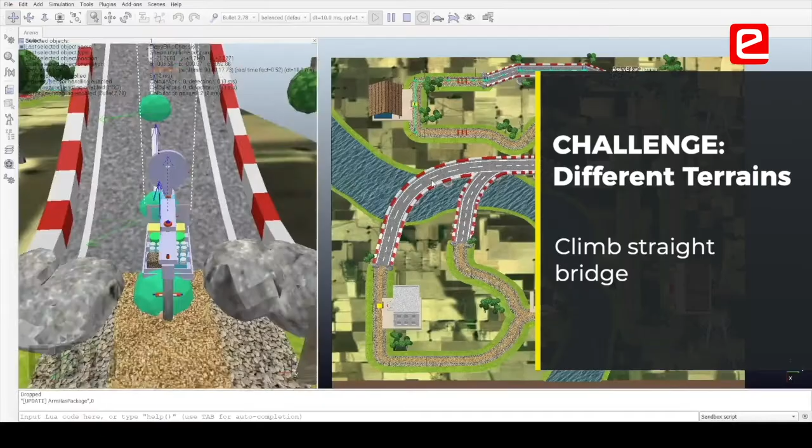When we have to design any control law, I will divide the categories under which the gain is changing, specifically when I am fixing the methodology as proportional control only. Then I will look into tuning the gains in different categories. But when I'm moving from one category to another category, is there anything that I should be worried about?

When we try to change the gains abruptly, the actuator may not be able to give that output all of a sudden. So I think that would be a problem in real time. It was in simulation. So the response time of the actuator, because when you are giving discontinuous inputs, that's what theory says.

Do you think this is scalable? At some level, faced with constant disturbances and undulations or irregularities in your path, this algorithm would be tantamount to remodeling at every step, and it's going to be very computationally intensive. Because if you're going to readapt these weights, it's exactly like a time varying feedback then, right? It's no longer going to be a constant gain matrix that's going to be fed back. So you're going to be treating the system like a time varying system that way.

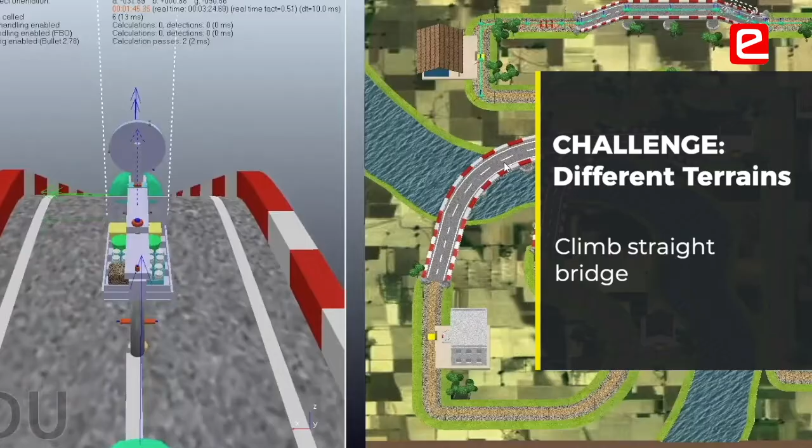And I'm not sure that is the way we want to model this. Because, of course, there are distinct changes in the model, in the weights, after every pickup or drop-off. But when you're going along a path and you face disturbances, those are not treated as changes in the model. Ideally, you can consider them as time-varying models, but that's not how we do it. We still model them as LTI systems, and we provide an LTI feedback to design an LTI controller, linear time-invariant controller. Not really a time-varying system as such.

But the approach you're adopting seems to suggest that, instead of treating these changes as disturbances, you are trying to incorporate them in the model. Now, the price you will end up paying is a lot of computation, a lot of burden on the computation, because you are expecting to be able to model this in exactitude. But the goal of controls, on the other hand, is that even with an inexact model, you should be able to design a fair enough controller that should address not just a single model, but a whole family of plant models.

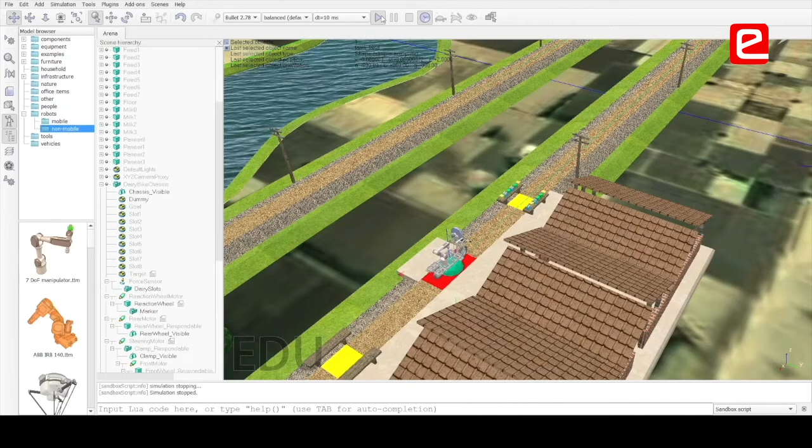You're moving along a straight path. Once you have stabilized something, unless there is some external disturbance, there's no reason for that particular system to move away from its stable equilibrium. It's only when there are disturbances or undesirable forces at play that you are waylaid from that equilibrium, and you want to have a restoring force or power generated which restores you back to that equilibrium, which is essentially the goal of control. Right? So for that, you don't necessarily consider it to be a time-varying system. You consider those to be just that, disturbances.

You'll have a huge lookup table for all possible scenarios, all possible changes, all possible fluctuations, all possible disturbances, and you have a lot of if-then clauses. If this, then that. If this, then that. Right? So every time you're constantly sensing and checking and doing that. Per se, I have no problem with that, except for the fact that when you face more complicated scenarios, this is going to be nightmarish, is what I'm going to suggest.

How important it is to be a tinkerer if you want to be an engineer, in the sense that you should be playing with toy cars and breaking things and making them again. And the way I would intuitively relate to this is that if you lower the CG, the ground clearance is less, and you have to put smaller wheels which have other disadvantages. As you raise it, ground clearance is better, and you can put bigger wheels and there might be less rolling resistance. So it just shows that in engineering, it's lots of conflicting constraints that one has to battle with in order to come up with the right kind of design.

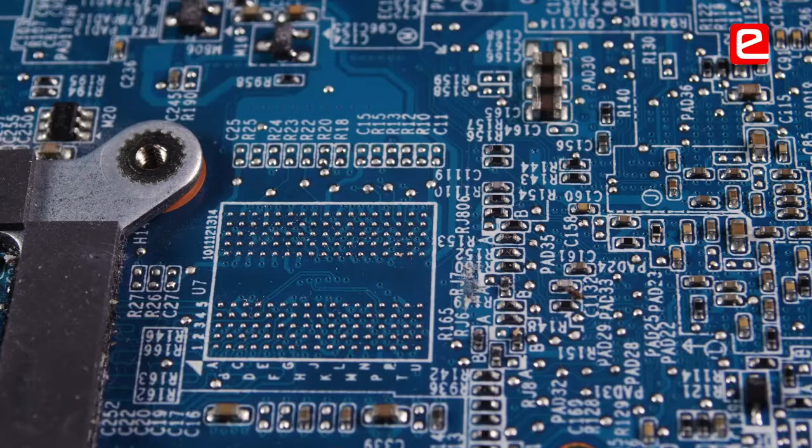He actually built this guy a steer-by-wire system. It's basically a totally automated steering system where your steering is just giving an input to your control system and the actuation is happening through motors. Professor Dwaipayan also appreciated that when you have electronic actuation, you can think of vehicles in a totally different way from human actuated vehicles.

And given the fact that actuators are not as expensive as they used to be, and compute is not so expensive, you could actually build a bike with stabilizers of this kind in your steering and all these kinds of things.

The one that you have done is easy to implement in hardware because these bikes are available everywhere, and you just add on those components and it can actually work in the field if you really want to make this useful. You add on some components and then it can do the work, rather than designing and manufacturing the entire system.

When a person is riding a bike and sees some way ahead and discovers that there is an uphill road ahead or a downward slope, the action that you take a priori, before you actually encounter the scenario, is feed-forward action. In this virtual environment, you might have put in some mechanism to detect when there is a change in terrain and accordingly take action.

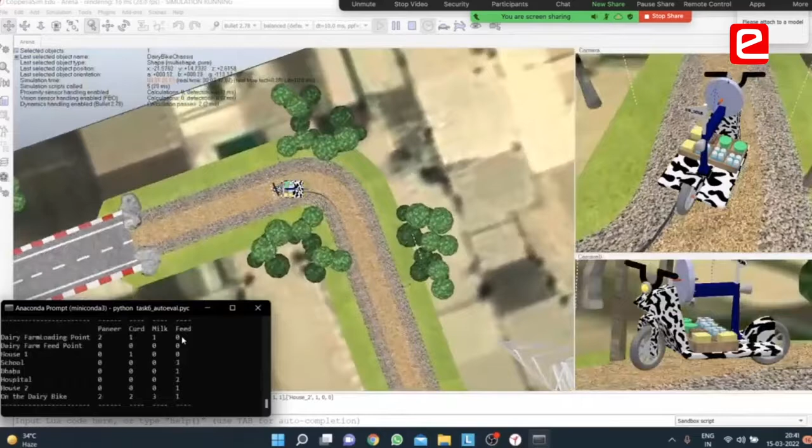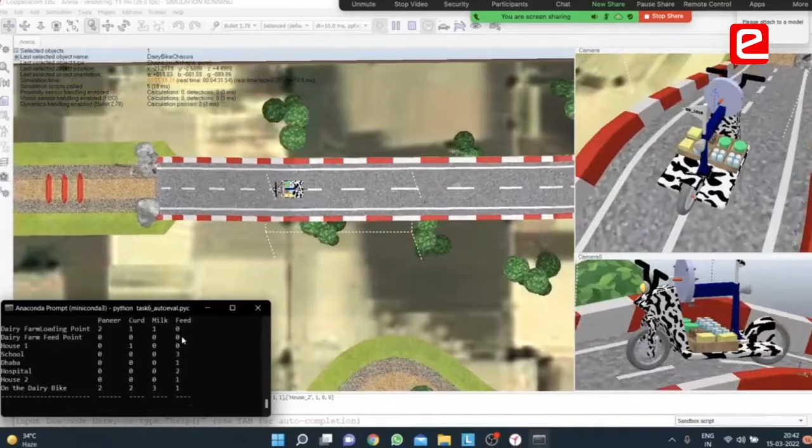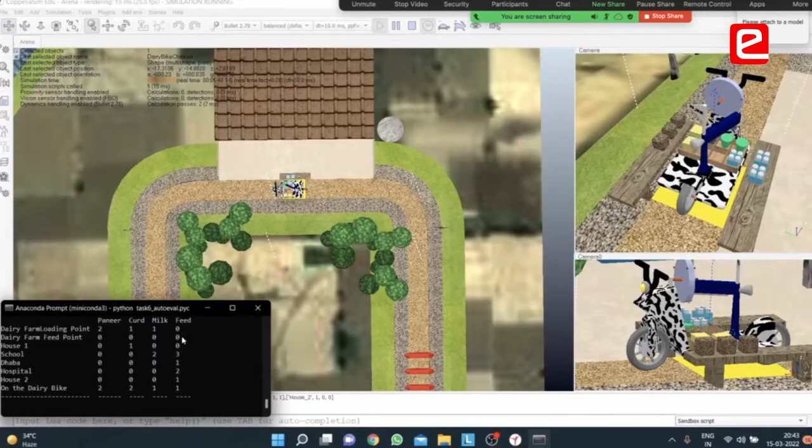In a real setting, when you have a bike running without a rider, like in a village with a cow on the road, implementing this feed-forward will entail a lot of sophisticated sensing. That's the price of feed-forward. The reason why people go for feedback as opposed to feed-forward is simply that feed-forward requires very sophisticated sensing. So when you're changing speed according to what lies ahead on the road, you are doing something akin to feed-forward, which is a costly thing to do.

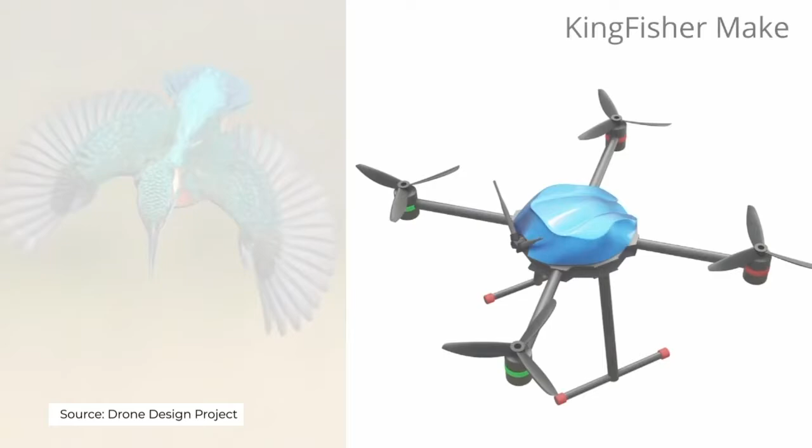These days in the controls community, we have a lot of emphasis on biologically inspired control strategies. We try to mimic the natural world, and we think that we human beings are the smartest around, and that the way we do things is somehow optimal; years of evolution have probably taught us that. But it also comes with a price. Once you are fixated on certain ways of doing things, it's very difficult to train our brains to shift the paradigm.

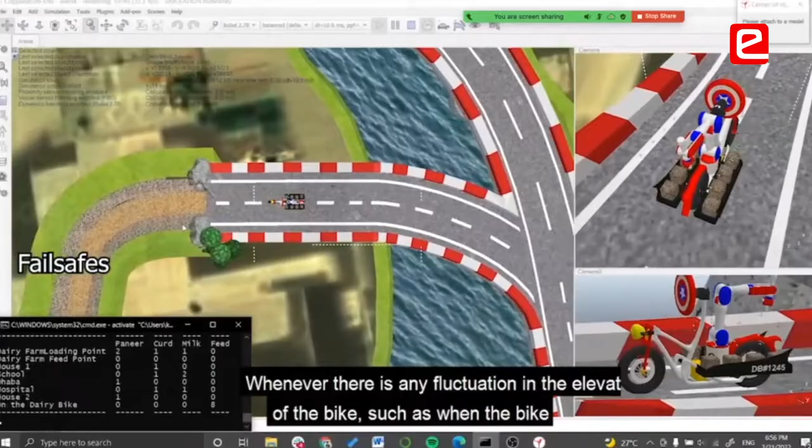Looking at some of these strategies implemented by students here, it occurred to me that we could transcend our human barriers and think of strategies not constrained by our commonsensical approach of what is best. Ideas like this back and forth motion: if we take the human out of the system, there are no such constraints. It's quite liberating when you use a lot of autonomy and you're not constrained to move or think as humans do.

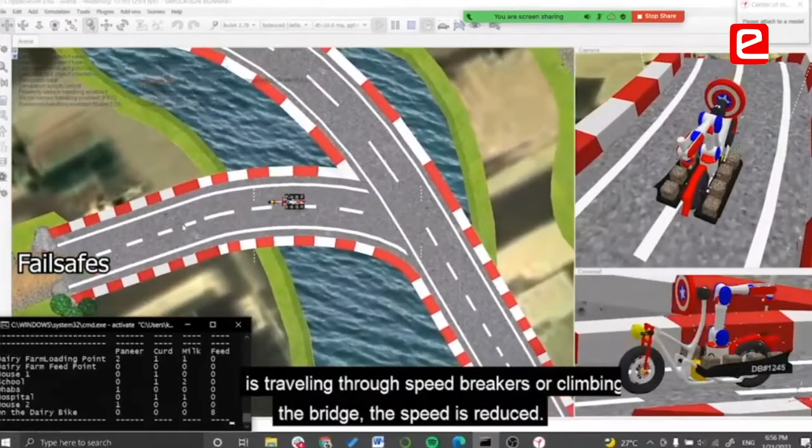So instead of always looking for inspiration in the animal kingdom or the natural world, sometimes I try to think in a counterintuitive fashion and see that things we don't necessarily do, but robots are capable of doing, might not always be a bad thing. In fact, they might sometimes be more optimal than we think.

There's a school of thought which goes towards biomimicry, and everybody feels that biomimicry is the answer to all problems. But given this engineered world of ours, there are possibilities available which might not be found in nature. So I think that's a pretty important takeaway from here.